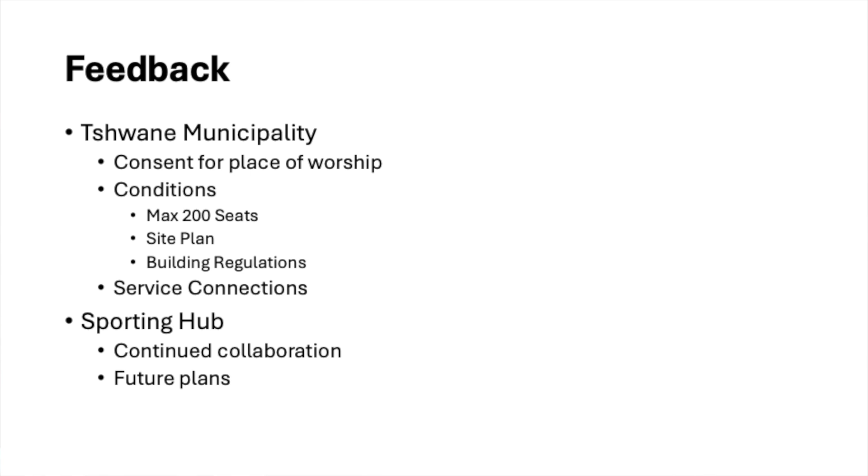In terms of feedback, we've got quite a lot of information from the municipality. As we said last time, the property has an agricultural holding character, so it has certain laws that go with it. One key and very important thing is that as an agricultural holding, we have consent to use it as a place of worship for up to 200 people.

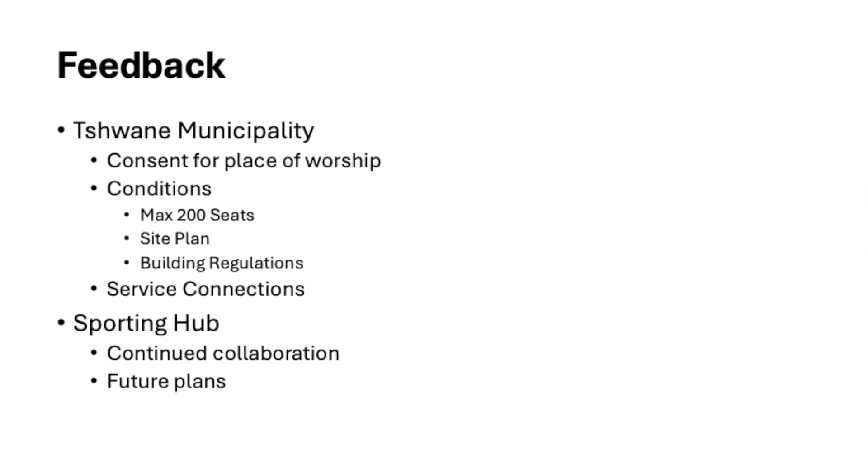That means we don't have to go into an exercise of rezoning. Rezoning would mean we'd have to build the road, which would incur a lot of extra cost. I think it would be very close to R1 million before we've even put a brick on top of another.

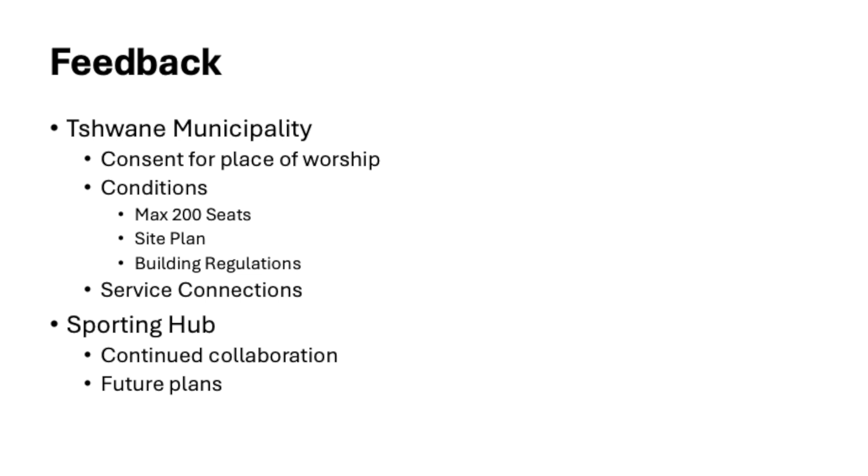So that's one thing, and it has some conditions. The maximum amount is 200 people, which is fine for us. We need to submit a site plan, and depending on the kind of building, a type of plan. There are some regulations we have to abide by, like staying within the boundaries, having a geological report, which we already have, and we can't go higher than 10 meters. There are some technicalities we have to abide by, but these aren't necessarily problematic for us at all.

The other thing we were a little nervous about, unnecessarily so, is the cost of getting the services connected - electricity, sewerage and water. Being an agricultural holding, this cost is really minimal, about 1,000 or 2,000 rand for the connections. So that's really a big blessing.

The other feedback is that Pastor and I met with the Sporting Hub owner. We have this relationship with the Sporting Hub - they've changed ownership, so we have a relationship with the business, not the person. The owners of the business have changed, and we engaged the lady. They have very ambitious plans, but they don't have the money.

We're going to have to manage this and keep considering them, but we need to understand - and I think we put it to her - that the priority is the church. Her grand plans will cost her a lot of money that she'll probably have to borrow. Whether someone will lend her money on property that doesn't belong to her is questionable, but that's in her court. We'll stay respectful of what she's trying to do, and we can be partners. Remember, we see this as a partnership in ministry, not just a business transaction. We need to keep that in mind.

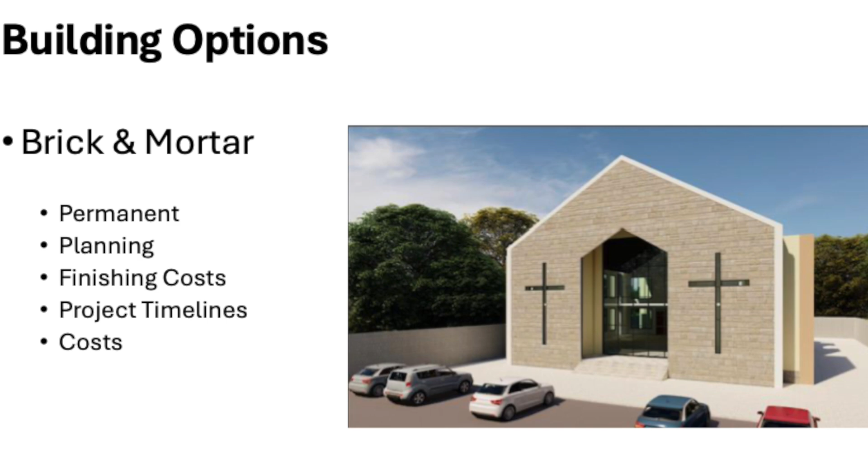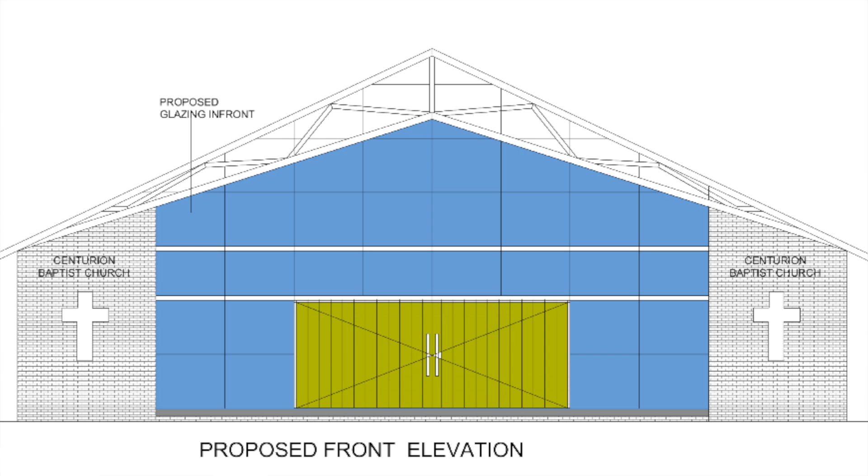We're not discounting this at all, and we need to look into it further. But this was our first finding, and Seth was kind enough to put together some plans. I'm sorry it's not that clear, but I'll make this presentation available to everyone so you can go through it. We have some ideas, and Seth has done an initial sketch on this.

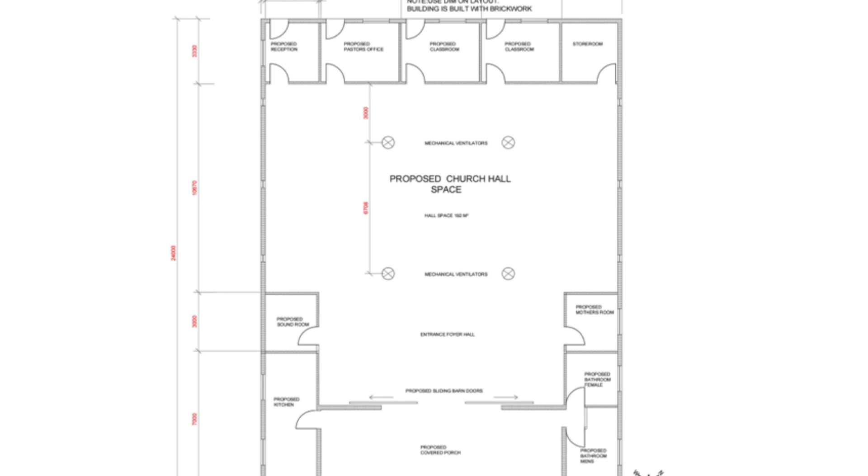The layout is really to have a number of facilities and rooms—this was just an idea to start getting the cost element in. Here we're looking at just putting up the bare bones, and we're already in excess of 650,000 as we stand here. So that was the brick and mortar option.

The next option that we spoke about is these semi-permanent tents. We have a number of churches who have them. Kobus and I went to see a business, and they actually took us to a site where they're busy putting up a big tent at a venue.

You get some beautiful options with these, and they are very, very nice. I think our initial indication, and we still need to exhaust this completely, is if you want to do it properly, it's quite expensive. We can go the very simple, white frame tent route, but it has some limitations.

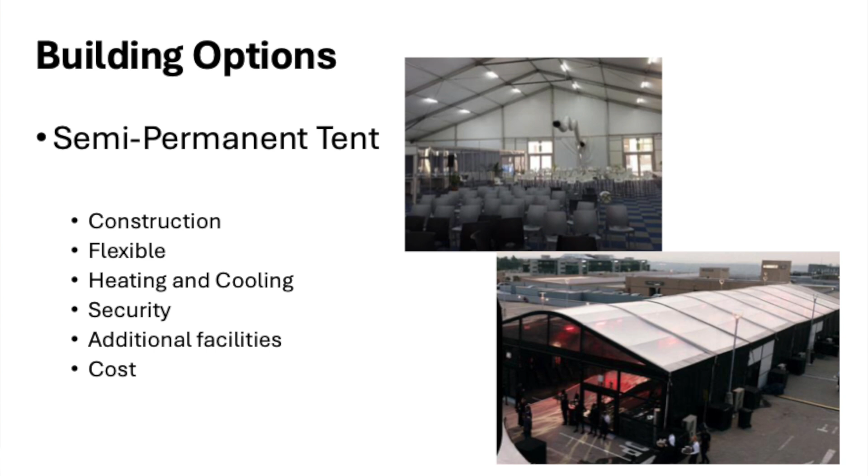The thing is, these are not maintenance free. We can all see the white tents, how grubby they look after a long, dusty winter. On the inside, it's an issue. They're very poorly insulated, so in summer they're going to be super hot, and in winter they're going to be super cold.

You need air conditioning and heating, which has implications—we'll have to change the type of electricity we supply, and we'll definitely have to go three-phase to heat that sort of room. Then the other thing is, it's not as secure. Even though you can have glass panels built and everything, it still remains a tent, mainly on the roof, but the sides can be done. So this is an option.

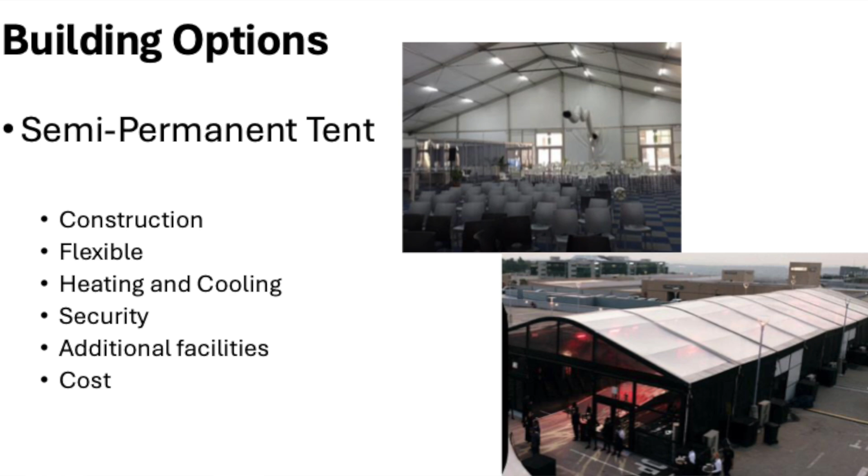Indications are, we haven't had the final cost yet, but it's going to be quite costly. We showed this last time, we seem to tend towards a shipping container-based structure, and we've done quite detailed costings on this.

At this stage, from a cost point of view, this looks quite gettable on the budget we have. It's modular as well, so we don't need to convert all the containers immediately to usable space. We can do that as we get the funds, because it is quite costly since they also have to be insulated—though probably less so because they're under roof already.

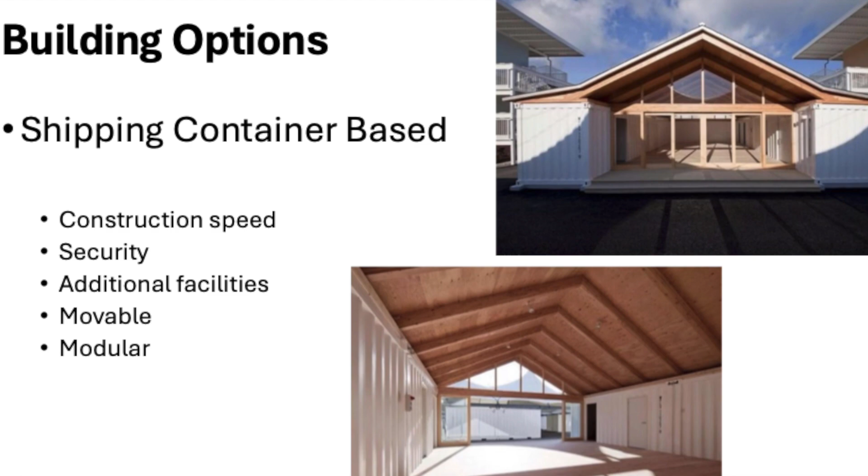This can be very, very nicely done, and there are some other advantages. Seth has put together a bit of a plan.

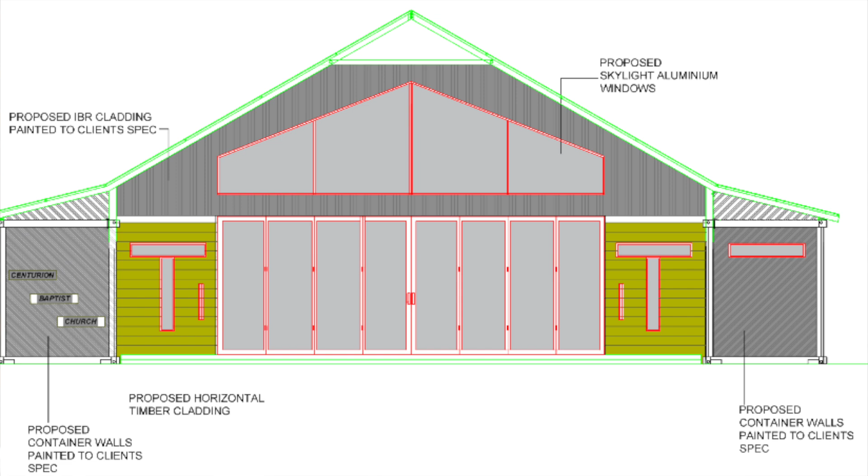Some of the detail is not accurate here—we're probably not going to go the stacked door route, we're probably going to have a big barn door. We've engaged with people like Kwesi on the sound, and he says we really do need a desk at the back. It doesn't help putting that desk in open space, so we'll probably have barn doors from the sides opening to the center. Those are just finer details we're talking through, and that's why input and feedback is quite important.

I'm really sorry it's not clear, but the perimeter is really a U shape—that would be the containers. In total it will be 5 containers, and each one can be used with entrances directly into the hall or from the outside. Certain ones you'll want entrance from the outside, others you want access from the inside.

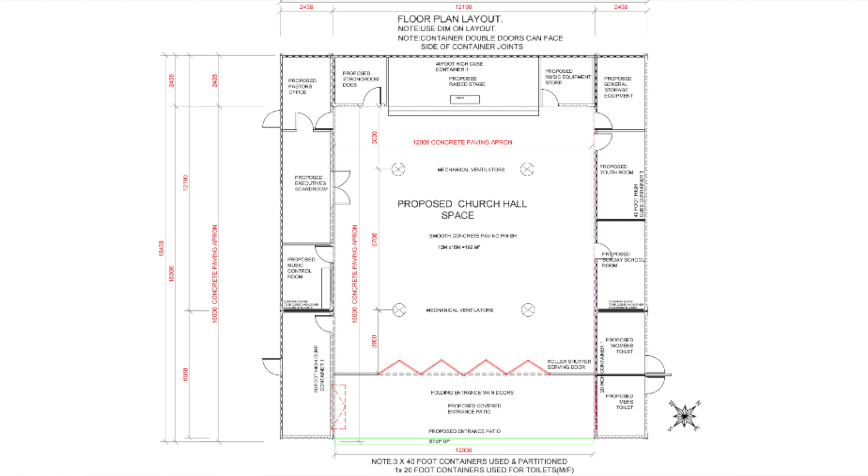The advantage there is that we don't need to pour the entire floor—the floor is quite an expensive component. Here, the containers just need to stand on little stands, so we only need to do the floor for the inside where the actual seating will be, which is in the region of 190 square meters and would quite easily fit.

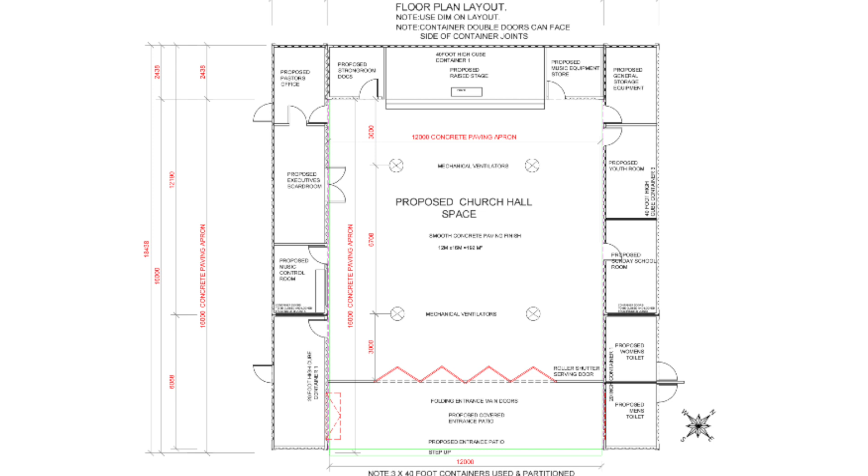Just to give you an idea, the 12 meters on the inside is to the end of these courts and to the end of that court. So it's pretty close to the size we have now, just not with this space, and we can use the space quite optimally.

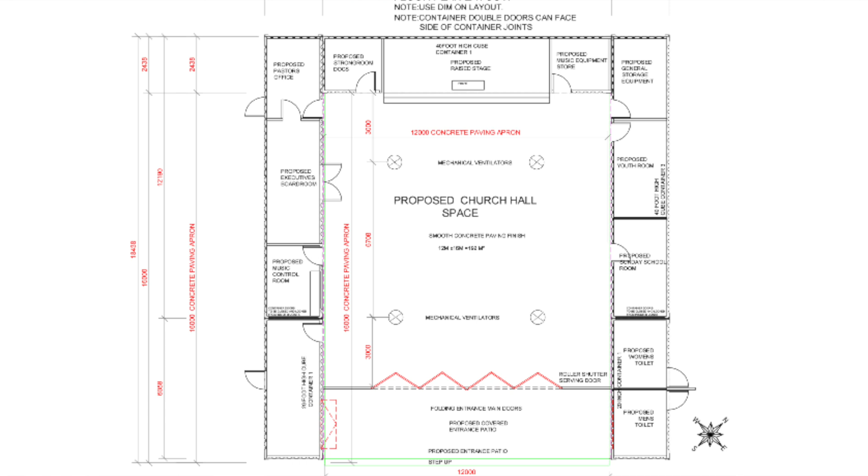The other nice thing is that you can cut up these containers. So what Seth has come up with on the front is we can cut open that container entirely and create a little stage, saving space that way.

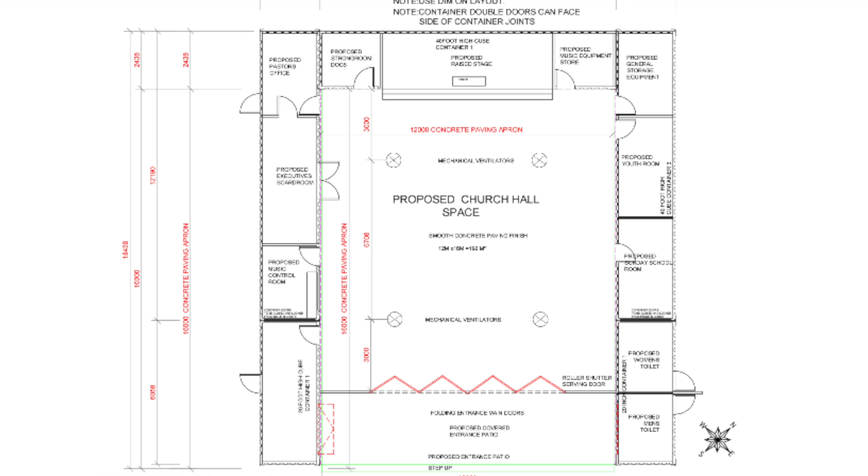Those are the ideas, and we really need to come to a point of finality where we say this is the route we're going to go. We have a bit more work to do before we come with a hard and fast proposal to the church, so this is where we are at the moment.

In terms of a site plan, Seth has also put together a site plan, and I think this really just serves to show how small the actual building is on this huge piece of property.

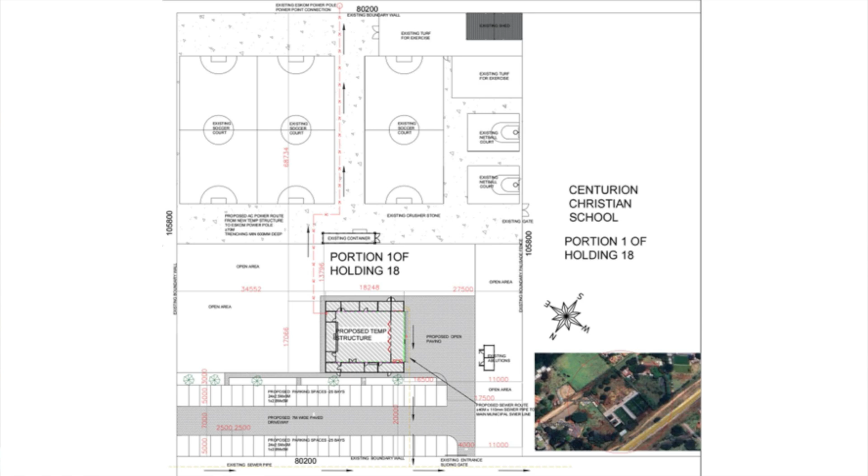So we're limited in that we have to put the property in the middle based on the geological report, and obviously this will move around in consideration with the sporting hub as well. So this is not final.

One of the key criteria is for every 4.5 seats, we need 1 parking space. So for 200 people, we'll need in the region of 50 parking spaces, which should not be a problem with the kind of area we have.

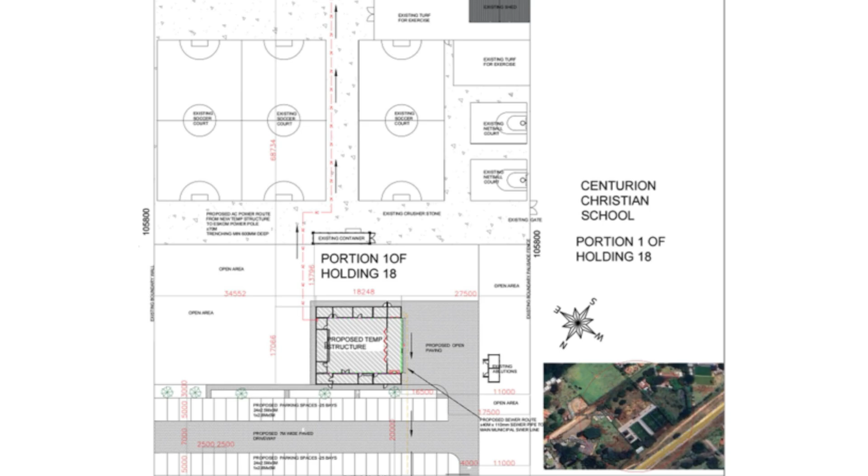What we basically want to ask the congregation is, can we go forward with this as a budget? At some point we are quite likely to run out of money and may need to come back to you again, but give us an amount to start with and get quite far to a point where we can just gather. It might not be the finished item, but just so that we have a place of our own to gather that the community around us and the school can use as well.

So we're looking at a number in the region of 650,000. We've specifically not looked at what's available and taken it all, because we're going to have some contingency going forward as well. So that is the idea of costs.

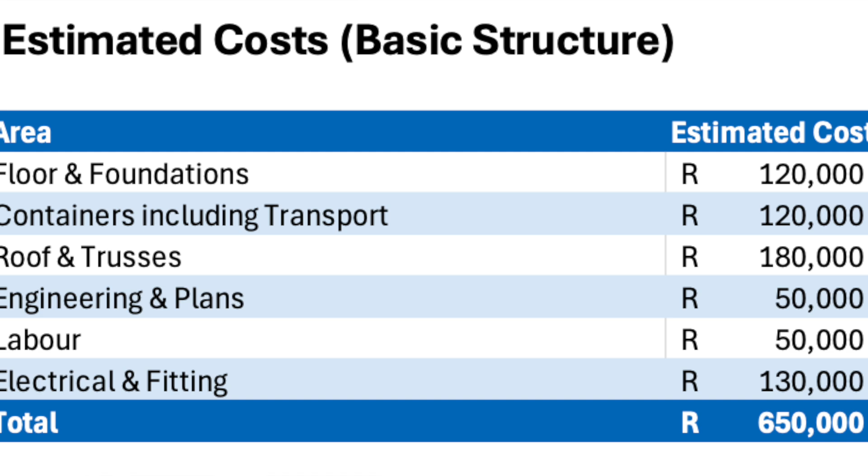So to us, there are 2 proposals we'd like to vote on for the members today. One is to be able to communicate with the church through our WhatsApp, the congregational WhatsApp group, but there will be times where we'll need to put certain proposals to the vote. For that reason, we would need to create a members-only WhatsApp group.

This is not to be exclusive. This is just to be able to use the polling or voting tool that you have on WhatsApp. So you can send out a question and vote yes or no. We would communicate that voting is taking place on the general church group, but then just so that the members can vote. And it's a nice auditable process, so there won't be any questions.

The voting can take place anonymously, or you can have your name attached to the vote, and I think that gives some comfort to people to do it. So that is the first thing that we want to ask - can we use that as a way of communicating? We don't want to make it the centerpiece of what the church is doing, but just to send updates and then request your feedback and input in terms of giving us a go-ahead to do things when we need to.

So, can we put that to the vote? And just jump in here - so we're going to deal with the first proposal now. But just before we get into that, are there any questions from the membership regarding the presentation and all that?